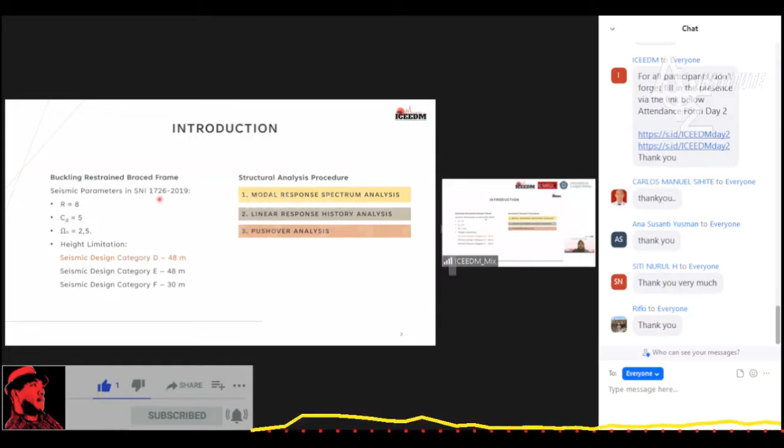In this study, the structural design of BRBF was varied with regard to building height: a 5-story building with a height of 17.5 meters, a 10-story building with a height of 35 meters, and a 20-story building with a height of 70 meters. This variation was chosen to determine whether structures that exceed the height limitation can still meet the code requirements under earthquake load.

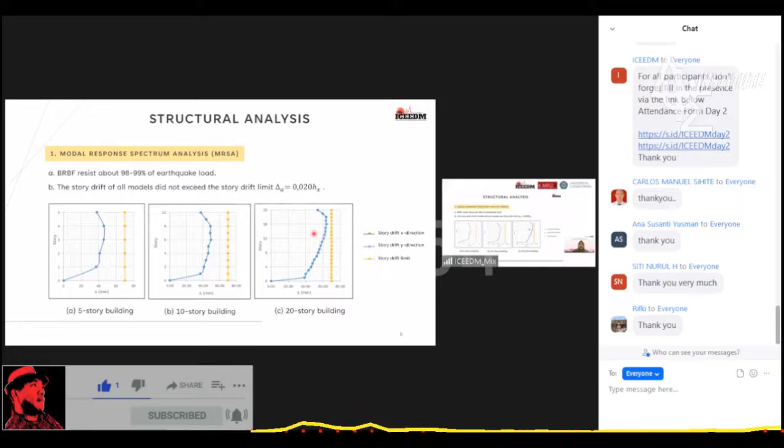And the story drift was evaluated. The green line showed the story drift in the X direction. The blue line showed the story drift in the Y direction, and the orange line showed the story drift limit. The story drift in the X and Y direction has the same value because the floor plan is symmetrical, and the result found that they did not exceed the story drift limit, and the story drift limit is 2% of story height.

The demand capacity ratio for all elements meets the requirements of less than 1. That means all the structural element designs with modal response spectrum analysis are able to resist the load on the structure.

This is the results of structural analysis using linear response history analysis. To verify the design, the structure was analyzed by linear response history after being designed with modal response spectrum analysis. Linear response history analysis requires three pairs of earthquake history data, and the earthquake history data must be spectrally matched to the design's response spectra. The earthquake record data used are El Centro, Chichi, and Northridge.

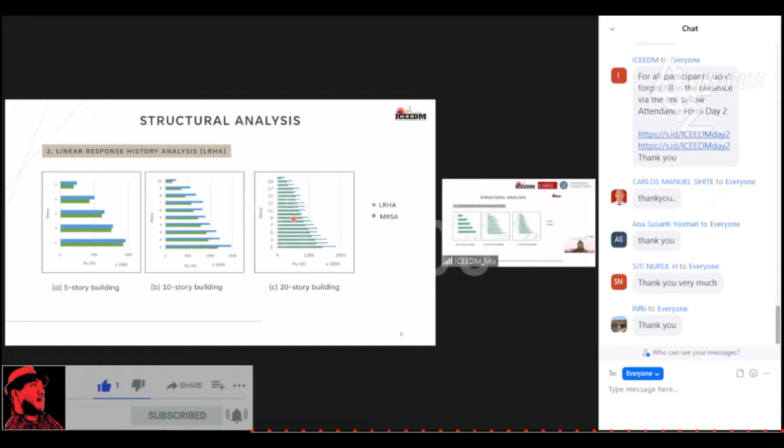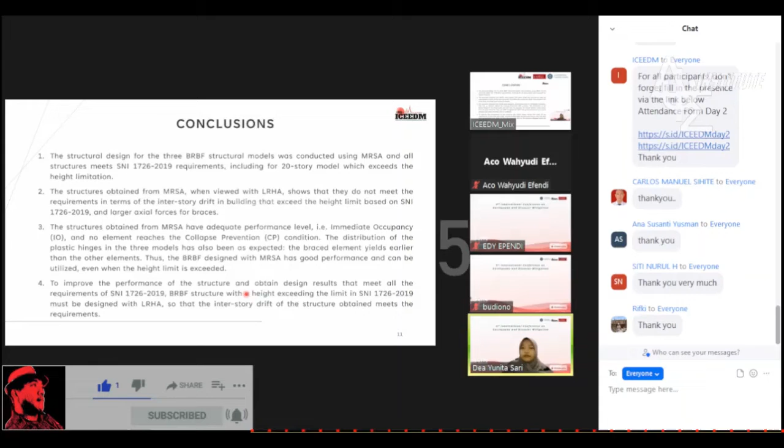And 4, to improve the performance of the structure and obtain design results that meet all the requirements of SNI 1726-2019, BRBF structures with a height exceeding the limit in SNI must be designed with linear response history analysis so that the interstory drift of the structure obtained meets the requirements.

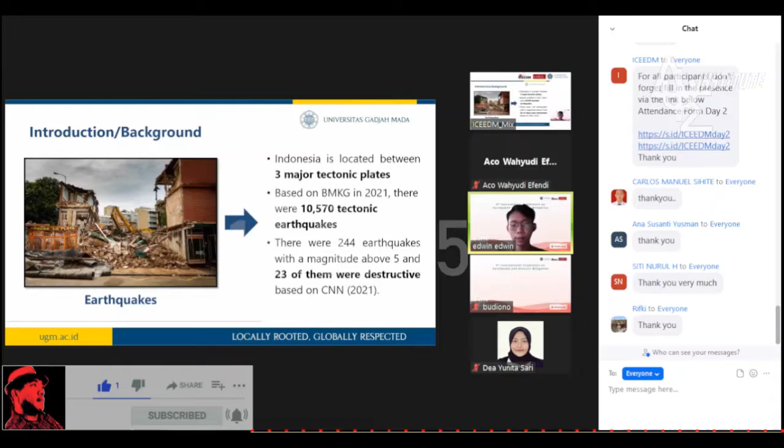First is introduction. As we know, Indonesia is located between three major tectonic plates, namely the Eurasian plate, Indo-Australian plate, and Pacific plate. Based on Badan Meteorologi, Klimatologi, dan Geofisika, in 2021 there were 10,570 tectonic earthquakes. Also, based on CNN in 2021, there were 244 earthquakes with a magnitude above 5, and 23 of them were destructive.

On the other hand, there was also an environmental problem because of waste of used tires. Based on Badan Pusat Statistik in 2021, there was an increase of 1.9% in the number of motorized vehicles. This shows that the waste of used tires will grow over time. One solution is to use waste of used tires to make waste rubber tire crumb, or WRTC, as a mixture for rubber compound.

On the other hand, many types of sand are available in nature, and we often encounter them in life, and they are also easy to obtain. Based on previous research, their surface friction may create a damping effect when encapsulated by flexible material such as rubber.

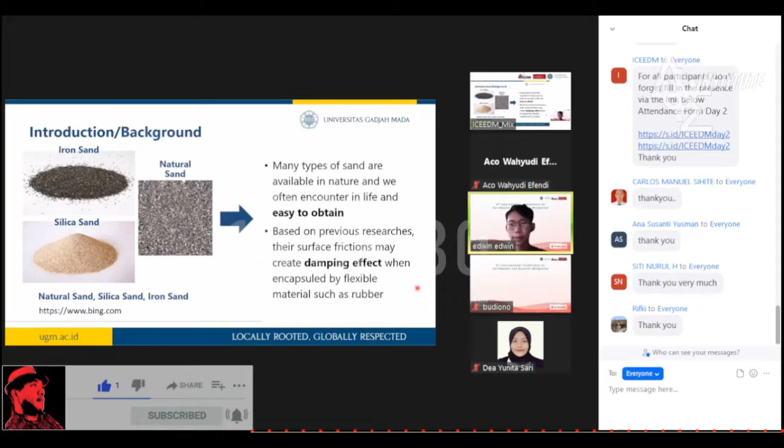Next, I will explain the materials and experimental procedure used in this research. The first material was rubber compound obtained from Polytechnic ATK Yogyakarta. The main component of this compound was natural rubber in the form of ribbed smoked sheets mixed with synthetic rubber, or styrene butadiene rubber.

The second material was WRTC, or waste rubber tire crumb, obtained through an ambient or grinding process. The grain size obtained for this material was mesh 100, or 0.15 millimeters.

Next is natural sand that was obtained from Mount Merapi in Central Java. The fineness modulus of the natural sand is 3.034.

The second sand we used was iron sand, obtained from West Java. The iron sand used had a uniform grain size of 0.15 millimeters, or mesh 100, with a fineness modulus of 0.0028.

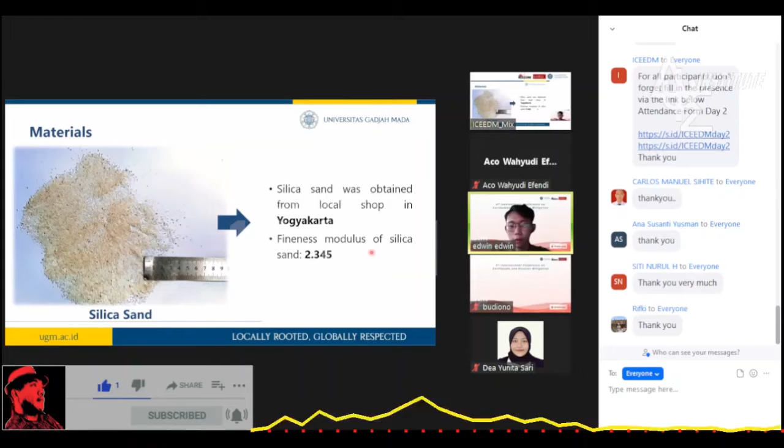Lastly, the material used in this research was silica sand, obtained from a local shop in Yogyakarta. The silica sand had a fineness modulus of 2.345.

Before being used to make specimens, natural sand, iron sand, or silica sand are washed and dried in an oven at 110 centigrade for at least 24 hours.

4 pieces of rubber test specimens were made for every mixture variation. For the tensile test and hardness test, the specimens used were R1 and R2 mixture, but for the damping test, the specimens used were all 5 variations.

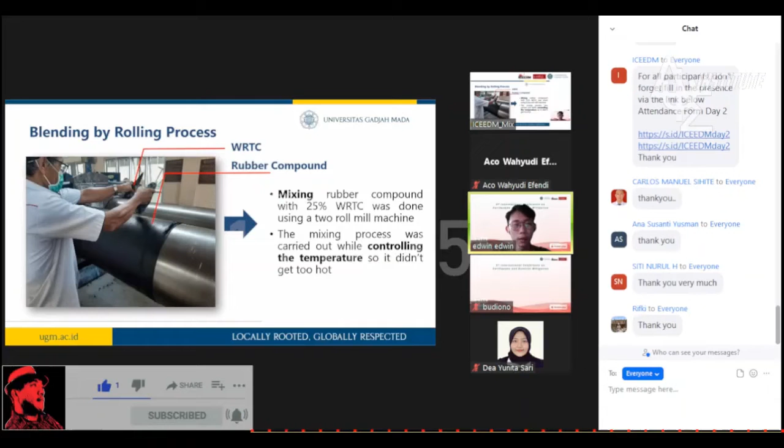After that, rubber mold was made and then filled with natural sand, iron sand, or silica sand, and the top side will be covered with a rubber compound, as we can see in the figure.

The last step was the vulcanization process using a press machine. The time and temperature used in this vulcanization process was the same that we get from the rheology test. The vulcanization process was done with a temperature of 130 centigrade and time for 17 minutes and 30 seconds.

Next is the testing procedure. First is the tensile test, and this is the specimen used for the tensile test. Dumbbell-shaped test specimens were used for the tensile test with dimensions as shown in the figure.

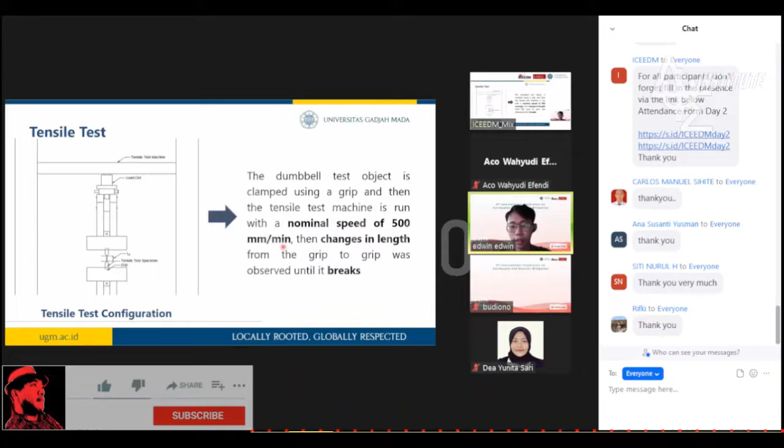And this is the tensile test configuration. The dumbbell test object was clamped using a grip, and the machine will operate with a nominal speed of 500 millimeters per minute, and the changes in length from grip to grip were observed until the test object breaks.

The tensile test was carried out based on SNI ISO 37/2011, and the test was carried out for R1 and R2 specimen.

The equation used to calculate the tensile stress was equation number 1, the equation used to calculate the strain was equation number 2, and the modulus of elasticity of rubber can be calculated using equation number 3.

After the tensile test, there is also the hardness test, and this is the hardness test configuration, and this is the specimen used for the testing.

For this test, compressive load used for this durometer shore A type is 1 ± 0.1 kilogram, which can measure the depth of penetration with a scale of 0 to 100 in 3 until 15 seconds.

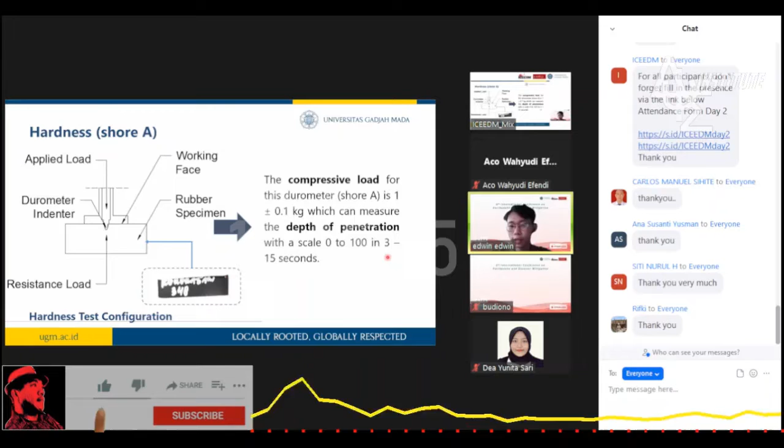There are two types of testing for rubber hardness: durometer test and IRHD test. Durometer test shore A was used in this research to measure the rubber hardness, and the hardness test was carried out based on ISO 7619 2010 standard.

After the tensile test and hardness test, there was also a damping test. This is the specimen used for determination of damping ratio, as we can see in the figure. It was made into a model resembling a viscoelastic damper using two pieces of rubber specimen with dimensions of 100 millimeters times 100 millimeters times 25 millimeters that was glued to the iron plate.

The method used to calculate damping ratio in this research was equivalent viscous damping ratio. The first step was to calculate equivalent stiffness using equation number 4. Then we can calculate the dissipated energy, which is the area inside the hysteresis loop. After that, we can calculate potential energy using equation number 5, and lastly we can calculate the equivalent viscous damping ratio using equation number 6.

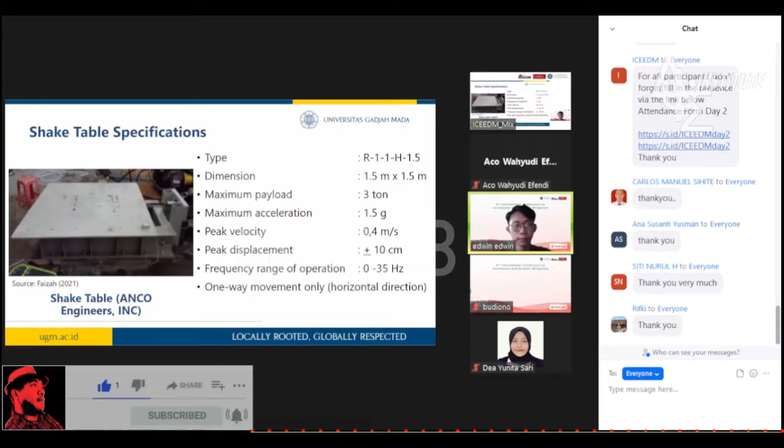Next, we can see the setup used for the damping test. The test was carried out by running a sinusoidal signal on the shake table with a frequency of 0.5 Hertz with various lateral deformations: 4 millimeters, 6 millimeters, 8 millimeters, 10 millimeters, and lastly 15 millimeters.

Next is result and discussion. From the hardness test, the results showed that the addition of 25% WRTC caused an increase in the hardness value of the rubber by 11%.

Different from the hardness test results, the results in the tensile test showed that the addition of 25% WRTC caused a decrease in the tensile strength by 19%. And this is the results for modulus of elasticity of rubber, where it showed that the addition of 25% WRTC also caused a decrease in the modulus of elasticity by 5%.

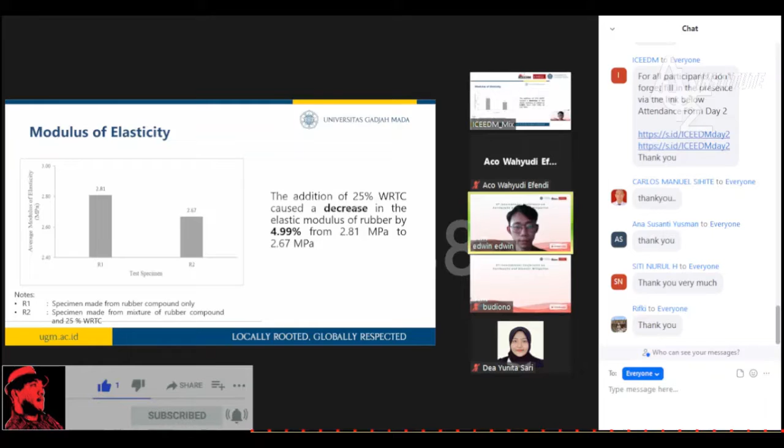Next, we will see the results for the damping test. Here, we can see the hysteresis loop graph for R1 specimen, made from rubber compound only. Next is the graph for R2 specimen, made from mixture of natural rubber compound with 25% WRTC. This is the graph for R3 specimen, or R2 specimen with compacted natural sand. This is the graph for R4 specimen, or R2 specimen with compacted iron sand. And lastly, this is the graph for R5 specimen, or R2 specimen with compacted silica sand.

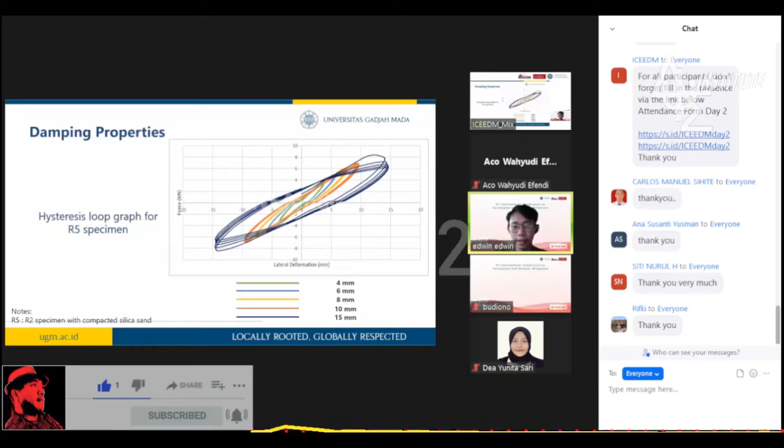Next, we can see the equivalent viscous damping ratio results for R1 and R2 specimens. Both specimens showed results where the ratio results for R2 specimen is slightly better than the R1 specimen.

Next, we can also see the results for R4 specimen and R5 specimen. The results show that the equivalent viscous damping ratio value increases as the deformation increases. This is due to the damping aid through friction between the sand grains. Therefore, it could be seen that the addition of sand has an effect on increasing the damping ratio of rubber.

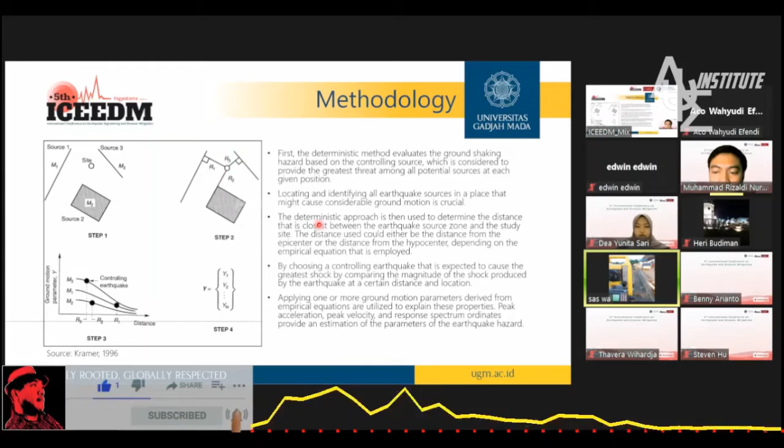Next, the methodology. First, the deterministic method evaluates the ground shaking hazard based on the controlling source, which is considered to provide the greatest threat among all potential sources at each given position. Locating and identifying all earthquake sources in a place that might cause considerable ground motion is crucial. The deterministic approach is used to determine the closest distance between the earthquake source zone and the study site. The distance used could either be from the epicenter or the hypocenter, depending on the empirical equation employed. By choosing a controlling earthquake expected to cause the greatest shock, comparing the magnitude of shock produced at a certain distance and location, one or more ground motion parameters derived from empirical equations are utilized to explain these properties. Peak acceleration, peak velocity, and response spectrum ordinates provide an estimation of the earthquake hazard parameters.

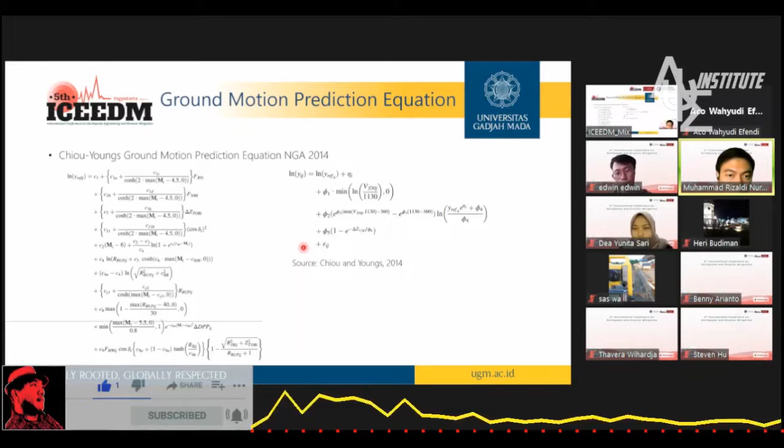Next is the logic tree framework. The weighting of each parameter calculation function is determined before the logic tree function output is assigned a particular weight. The weighted value represents the amount of confidence in the parameter in question. The final result, which is the total different weight value, may be calculated using the weight value. When all parameters are added together, a value of 1 is achieved. The final result is calculated by adding the weight of each parameter.

Rizaldi, are you with us? Rizaldi, are you with us? This connection is lost. Okay. Yes, are you there? Yes, I'm here. Can I continue? Okay.

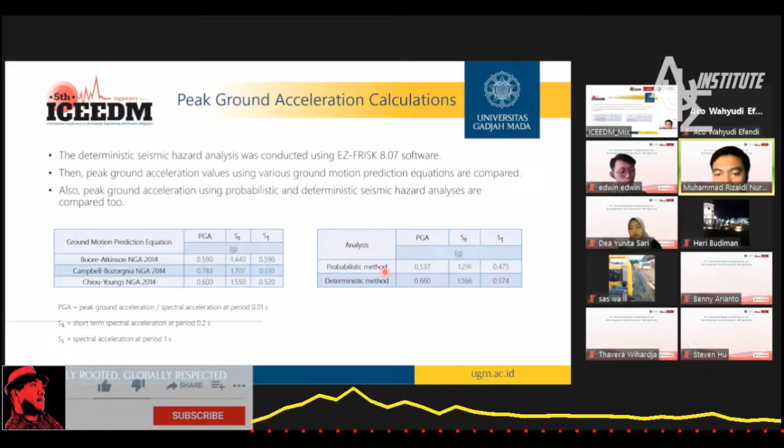The PGA value is 0.66 G according to the deterministic method, compared to the calculation with the probabilistic method of 0.537 G. This is because the deterministic method always considers the worst case scenario of an earthquake event, while the probabilistic method yields a lower value because of the uncertainty surrounding the possibility of an earthquake.

Until now, no one has been able to determine when an earthquake will occur. We can only predict earthquake behavior based on past events, so it's better to prepare for the worst than to cause a lot of loss of life.

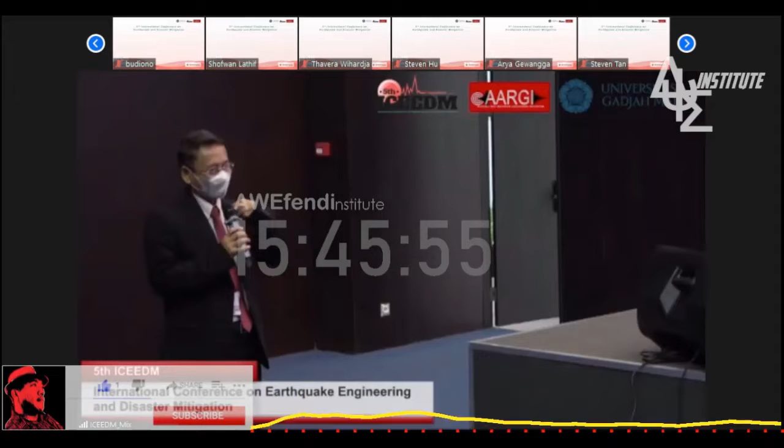The first one is related to the beam-column joint model. The first model was made from ECC. You showed us a comparison of the cyclic loading results in that figure. My question is: were there any cracks developed on the ECC model beam-column joint? At the end of the test, the slide you showed us did not let us see the final result of the test in terms of the cracks.

If it did crack, what is the comparison between the crack width, maybe the number, and also the pattern of the crack, comparing the normal concrete and the ECC concrete? Also, whether you included the reinforcement or not in the finite element model.

Thank you, Prof. Ria. Please, Mas Asdam. Thank you, Sandro, for the excellent questions. I'm going to answer the first one.

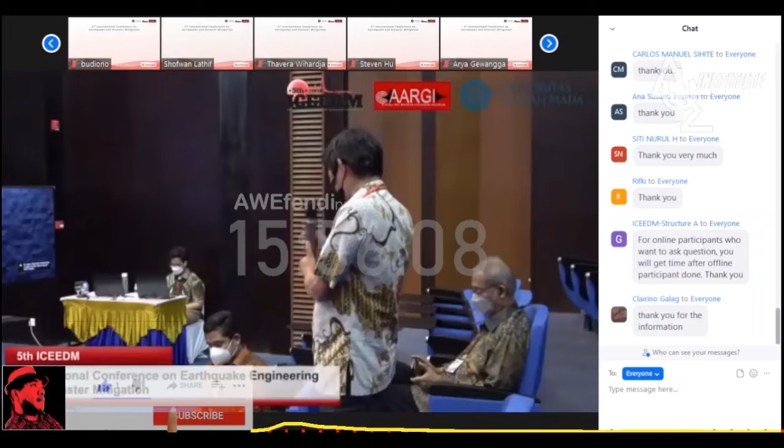Well, thank you, very interesting question. I can confirm that we have done some measurement outside the laboratory. So when I was there, we did some testing and implemented the DIC outside. Regarding the focal length of the camera and the surface of the region of interest that we capture for the phenomenon of cracks, it depends on how large your region of interest is. If it's large enough, you have to move your camera away. But the concern is the pattern applied on the surface - it depends on the size of the region of interest. If you use very small dots, your camera cannot capture the movement of the dots or pattern. So basically you have to try first and compare with the actual cracks when they occur. But the possibility is there, so don't worry.

For this specific experiment, we did get results from the DIC and then the assessment, but we did not present that here at the moment - it's in another publication we plan to publish. But if you want to see the verification we have done, there is one paper we published, though it's not on the beam column joint, rather on the 4-point bending test of the beam. So you can see what we did there. Thank you.

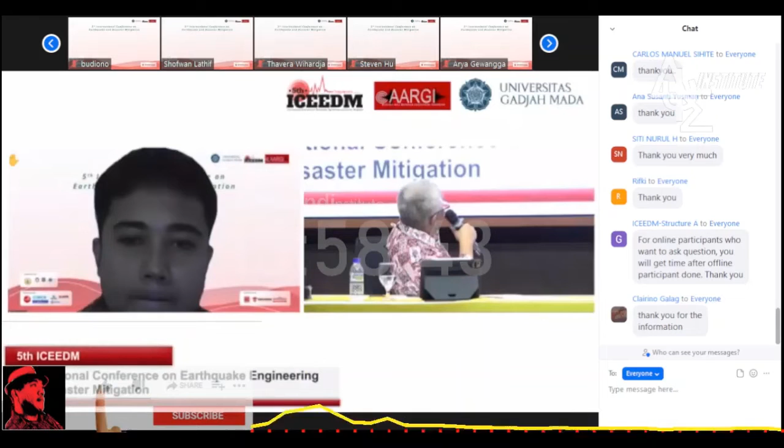Okay, thank you, Professor. My name is Benny, I'm from Universitas Gadjah Mada. I would like to ask a question for the last presenter, Mr. Muhammad - Rizaldi, okay. Yes, Professor.

So my question is, well, first of all, it was a nice presentation and an interesting topic. I would like to ask about the methodology you use. Why did you use the ground motion prediction equation? You did 3 equations - if I'm not mistaken, it was Boore-Atkinson, Campbell-Bozorgnia, and Chiou-Youngs. Why did you choose these 3? Thank you.

Rizaldi, are you with us? Yes, yes. Thank you, Mr. Benny, for the question.

The first reason why I'm using these 3 equations is because these 3 equations specifically use data from shallow crustal earthquakes, which is very suitable for my research location, because my research location only has 6.03 kilometers surface projection from the Seulimeum South segment of the Sumatran fault zone. That fault is also identified as a shallow crustal earthquake source by previous researchers. Second, this equation was also used in making the seismic source and hazard map 2017 by Pusat Studi Gempa Nasional for probabilistic seismic hazard analysis. So it's fair enough to compare the deterministic seismic hazard analysis and the probabilistic seismic hazard analysis using the same equation. That's all from me, Mr. Benny.

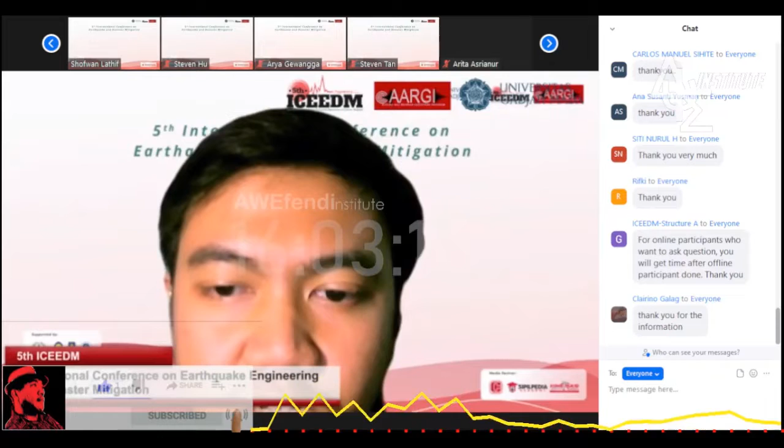First of all, the objective of this study was to design the seismic load due to the excavation and construction of the Dam Suppletion Tunnel. Because, as I said before to Mr. Benny also, the site location has a 6.03 kilometer surface projection from the Seulimeum South segment of the Sumatran fault zone. So that's why I need to design the seismic load in case there's a big earthquake source from the Seulimeum South segment Sumatran fault zone.

And last, for the research, I also want to compare the DSHA and PSHA on the stability of the support system for the Dam Suppletion Tunnel. It is still ongoing, but it is crucial to do the seismic load design first. So that's all for Mr. Clairino. Thank you.

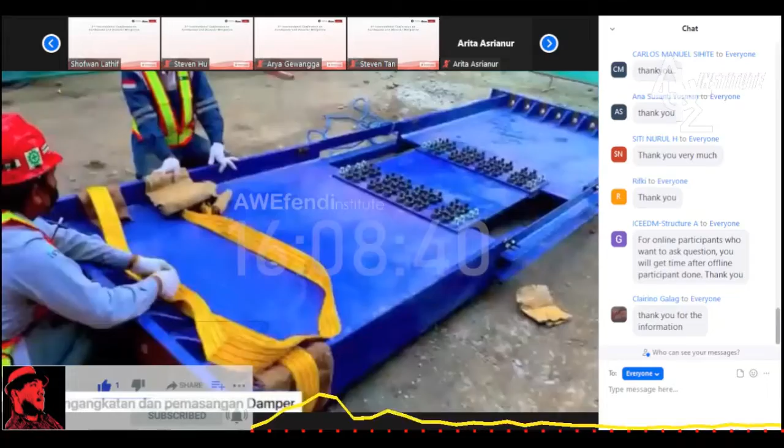This damper is designed to reduce lateral displacement, so that the interstory drift should be less than 1%. If we don't use this damper, the lateral interstory drift will be up to 2%.

When the earthquake enters our structure, the energy has been reduced, maybe up to 60 or 70%. That's why the effect of the earthquake on our building will be much better. We hope that using these dampers will make the building more comfortable. Without them, the earthquake energy would enter our building at full capacity; however, at every floor that we have, it will be reduced by the damper.

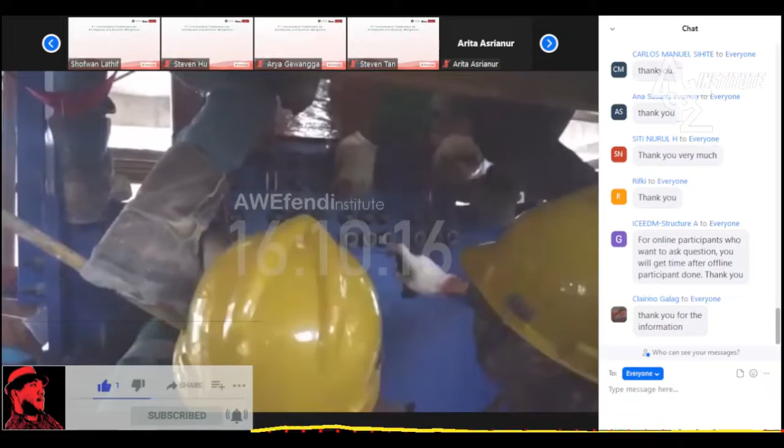This building is also equipped with 13 accelerometers. There are 3-axis accelerometers on the ground floor, and there are 2-axis accelerometers on certain floors, so that we can monitor the lateral displacement at any time. At certain displacement levels, these accelerometers can alarm, and hopefully everybody using this building will be safer.

We are going to use this seismic device, so of course we should make sure that all the parameters used in the model comply with the real behavior of the device. Therefore, it is important that the device be tested before we use it in the model and before we use it in the real building.

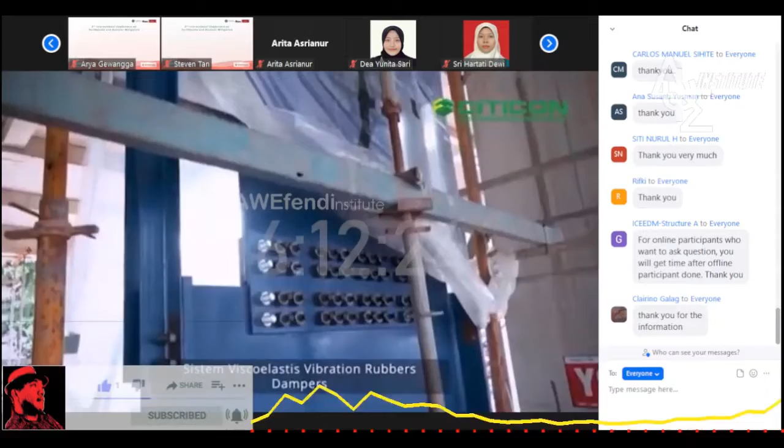So we have to consider the situation. Related to preciseness, we have only a 2 millimeter tolerance in order to make the damper work properly. The second issue relates to construction schedule matching: we have to start construction, then pack and ship to Indonesia. So in terms of scheduling, the method we use is steel plates in the position of the dampers, and once the damper comes to the site, we release the dummy damper and replace it with the original one.

There are 2 objectives of testing this device in the laboratory. The first is to find out the proper parameters to be used in the modeling, and the second is to make sure that the behavior of this device satisfies the code.

This kind of method is actually really interesting, because we have to check the preciseness of production in Indonesia to match the standard production from the damper production in Japan. The second thing we have to match is the scheduling, how to maintain the progress and sequence to the arrival of the damper from Japan.

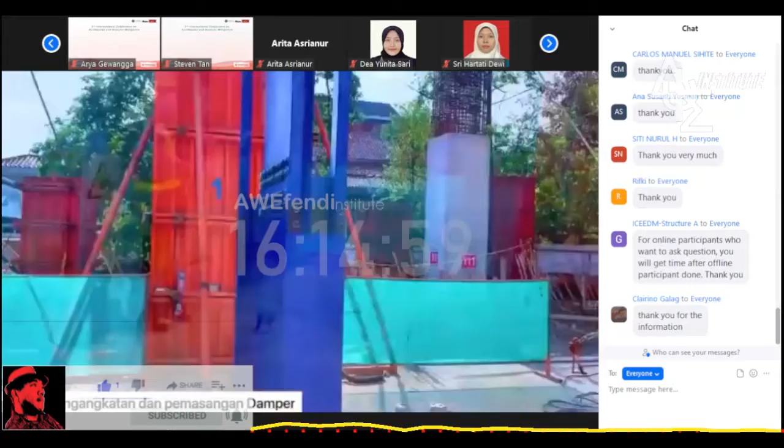In SNI 2019, this device is categorized in chapter 13 about dampers. It is said in the code that before we use this device, we should carry out laboratory tests to check the behavior of this device, whether it is satisfactory or not. So in terms of the use of the damper, these are the two aspects we really have to be concerned about: number one is related to construction method preciseness, and the second one is how to match the schedule.

Construction becomes more challenging, and we are very thankful to all parties, from the consultant, the producer, and the contractor, for making the construction possible. We would like to promote the use of this kind of application in Indonesia, and this kind of damper is not only for new buildings, but also a very good opportunity to implement in existing buildings.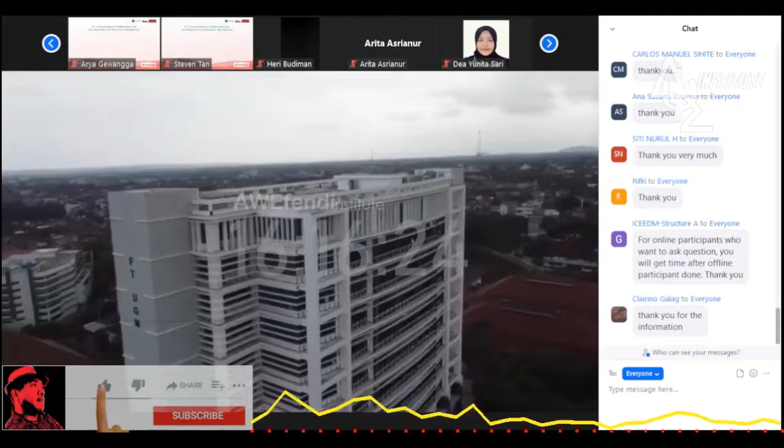When an earthquake comes and strikes, our structure will behave better and better, not only at one earthquake, but at every earthquake we have in the future, in order to retrofit and seismically improve the performance of existing buildings.

So we do hope that the use of this kind of damper system, made of viscoelastic high damping rubber damper, becomes more known in engineering communities, and that in time we can use it in more kinds of construction, both for new buildings or for existing buildings for seismic improvement. Thank you.

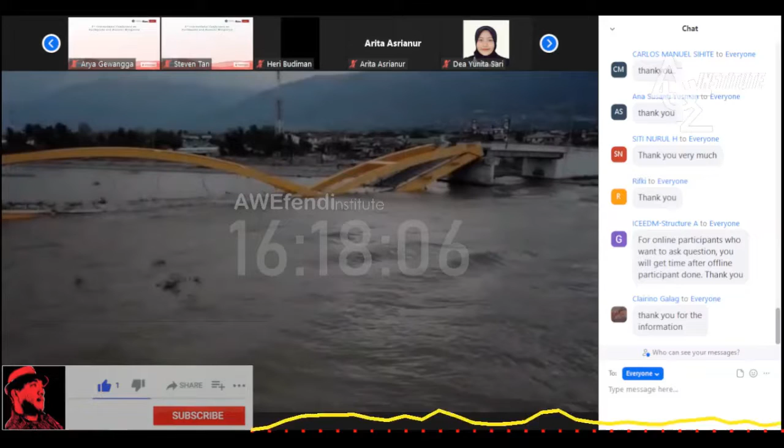Indonesia experiences frequent earthquakes due to its position on the Pacific Ring of Fire, an arc of intense seismic activity where tectonic plates collide. It stretches from Japan through Southeast Asia and across the Pacific Basin. Earthquakes are one of the biggest threats to Indonesia in terms of natural disaster, as they often strike in populous areas such as the bigger cities, making many people lose their life, homes, and property.

According to the USGS, earthquakes with a magnitude of around 5 on the Richter scale occur almost daily in Indonesia, but often with little to no damage. More devastating earthquakes are the ones with a magnitude above 6 on the Richter scale. The great degree of material damage is exacerbated by the poor state of the country's infrastructure, which only increases the devastating consequences of earthquakes.

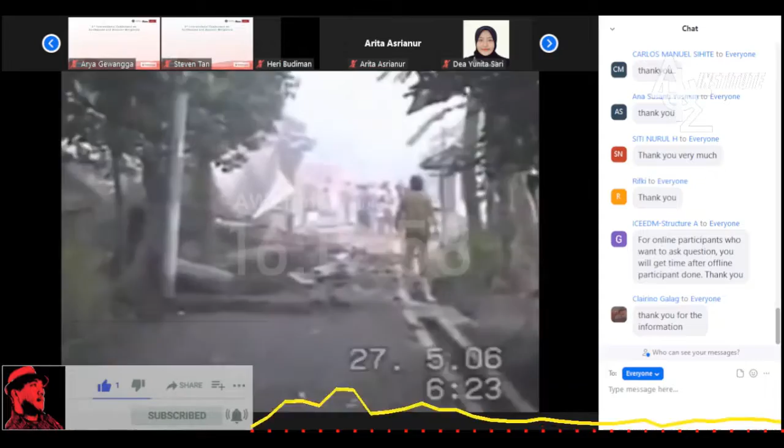On 27 May 2006, an earthquake occurred in Yogyakarta and its surrounding area, such as the districts of Bantul, Klaten, Gunung Kidul, and Kulon Progo. The 2006 Yogyakarta earthquake, also known as the Bantul earthquake, occurred at 5 a.m. with an epicenter position of 7.97 degrees south latitude and 110.44 degrees east longitude, a depth of 10 km, and a moment magnitude of 6.3.

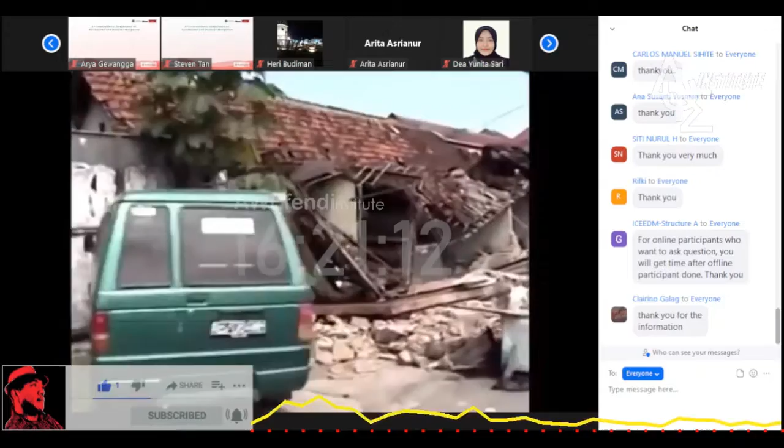The epicenter of the earthquake was located about 6 km from the coast at a depth of 35 km in the South Sea, and the maximum MSK intensity was 8. This earthquake shocked the coastal areas of Parangtritis, Baron, Samas, Blagah, Wonosari, and Gunung Kidul, located in Ring 1, followed by Bantul, Kulon Progo, and Klaten district in Ring 2. Other DIY areas were also shaken, from Keraton and Sapen to Kaliurang. The earthquake was even felt as far as Purwokerto, Magelang, and Purbalingga in Central Java.

The earthquake caused damage to people's homes and public facilities. The area that was most severely affected after the earthquake was not Ring 1, but Bantul Regency, located in Ring 2, with the largest concentration of losses in Bambanglipuro sub-district, followed by Imogiri, Pleret, Piyungan, and Sewon. The Bantul area has an alluvial soil structure, which caused severe devastation after the earthquake.

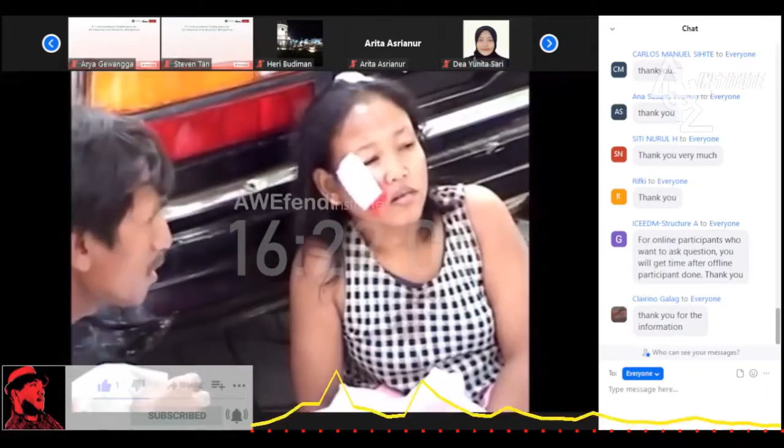Overall, the earthquake resulted in more than 5,800 people being killed, 120,000 buildings destroyed, and financial losses of 29.1 trillion rupiah, or 3.1 billion US dollars. The government immediately responded to this condition with more speed than in responding to the post-tsunami disaster in Aceh at the end of 2004.

Construction company? Infrastructure?

Well, you're not wrong. But it goes beyond your imagination. Here's a story you have never heard before.

The world's business has changed since the pandemic, but our company experienced a tremendous change to keep growing. We are more than just a construction company.

See this beautiful property? Fascinating, isn't it? For each of our customers, we work passionately to improve connectivity, efficiency, and ease of access for citizens' lives. And that's not all, we do much more.

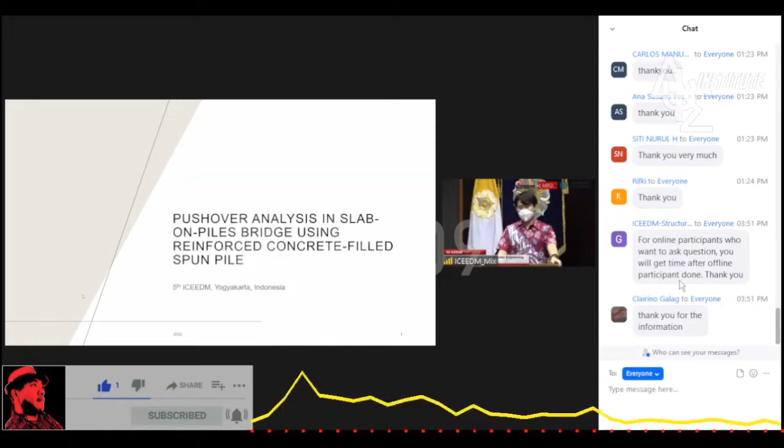I will divide my presentation into 5 sections. I will start with an introduction, and then I will talk about the theoretical background. Then I will talk about the research methodology used in this study. Next, I will talk about the result, and the last one is the conclusion.

The slab-on-piles bridge is one of the railway bridge structure types currently being developed in Indonesia. There are several railway bridge structures that use this structure type, such as Soekarno-Hatta International Airport Railway Bridge, Adi Sumarmo International Airport Railway Bridge, and also Yogyakarta International Airport Railway Bridge.

The structure type consists of 3 main components: the slab, the pile head, and the spun pile.

The structure type also has some advantages. First, it is more stable for roads built above water-saturated soil, because it uses spun pile that penetrates into a certain depth of soil to hard soil. Second, the quality is more guaranteed because it is produced at the factory. Third, the construction time is faster. And fourth, cost for maintenance and also for construction is more efficient.

The problem is that the construction of slab-on-piles bridge structure is a concern, because the structure is prone to earthquake loads. And as we know, Indonesia is very prone to earthquakes.

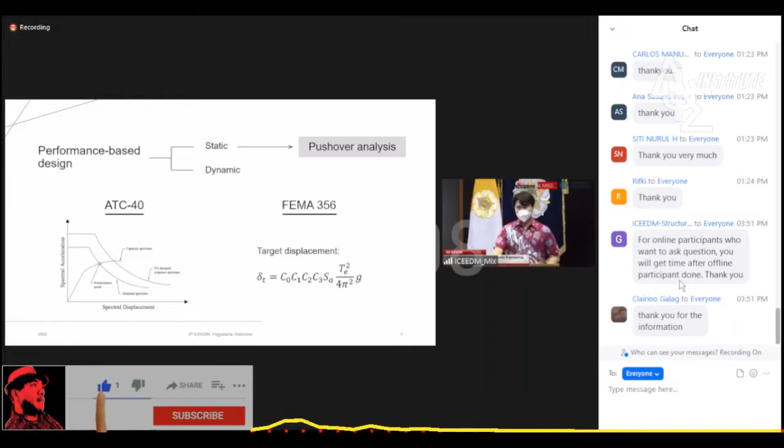Capacity is the structural ability to resist the demand of earthquake load, and this depends on the strength and the deformation ability of its component of the structure.

The demand spectrum is the earthquake load applied in this graph in the form of an elastic response spectrum at 5% damping.

The two spectrums, the capacity and the demand spectrum, are depicted in a single graph, as we can see in the figure on the left side, to find the performance point. The performance point is the intersection of the capacity spectrum and the appropriate demand spectrum.

Meanwhile, in FEMA 356, the pushover analysis, especially the nonlinear static pushover analysis, can be done by calculating the target displacement. The target displacement shall be calculated by following this equation after the force displacement curve is obtained.

The performance determination of the slab-on-pile bridge structures in this study is based on ASCE 61-14, because the structure is similar to a wharf structure.

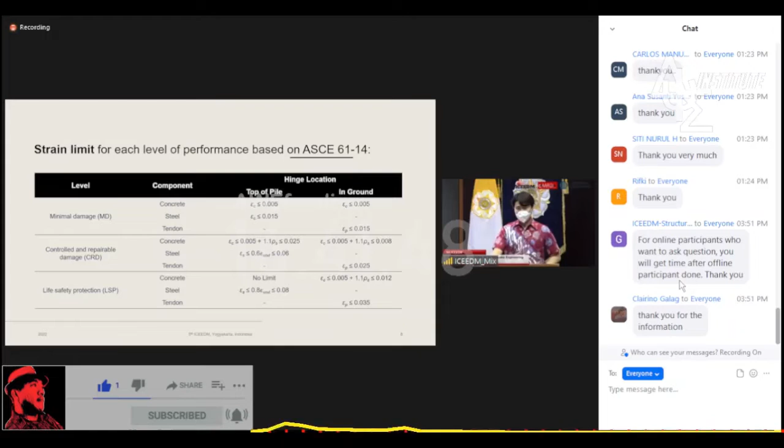The slab dimensions are 20 by 10.3 meters, and the free height of RCF-SP we use is 6 meters.

Standard penetration test to 30-meter depth of soil, and based on the calculation, the soil type is classified as soft soil. The fixity depth of the 6-meter RCFSP is obtained at 3 meters from the ground level, so the effective length of RCFSP is 9 meters.

The earthquake analysis we use in the study is the response spectrum analysis. The response spectrum design is constructed based on Indonesia National Standard, or SNI 2833-2016, where the location of the bridge is in Aceh, Indonesia. Linear elastic bridge design is carried out with a response modification factor, or R, of 3.5.

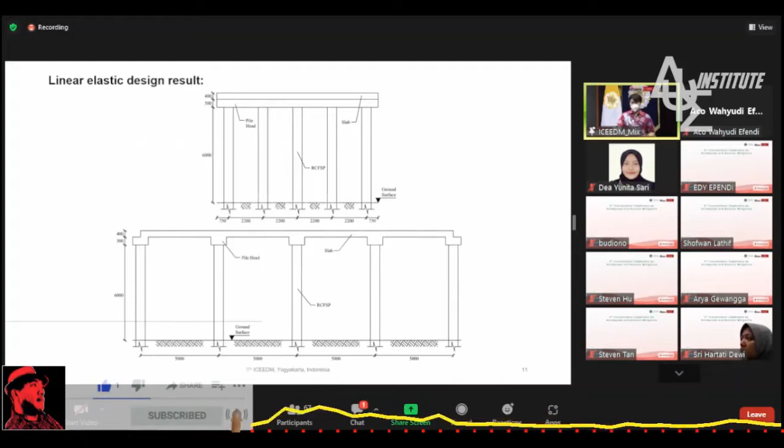After that, we can jump to the next part of this analysis, and the next is nonlinear static pushover analysis. The first step we use in this analysis is the determination of plastic hinge properties. The plastic hinge properties in the study are assumed to be located only at the points where the maximum moment occurs, so the plastic hinges are located at the top and the fixity point of each RCFSP.

The plastic hinge properties are defined in the form of moment curvature diagram. Moment curvature diagram calculations are carried out under considerations of axial load that consist of structural dead load, additional dead load, and half of live load. And then after the moment curvature diagram is obtained, we can run the nonlinear pushover analysis.

In this nonlinear pushover analysis, unit lateral loads are assigned at all top nodes of the RCFSP to perform the pushover analysis in the longitudinal and transversal directions. The nonlinear geometric parameter, or P-delta, is applied, and the pushover analysis is performed until the monitored displacement is reached the displacement control, where the displacement control is a 5% drift ratio of the effective length of RCFSP. In this analysis, ATC 40 and FEMA 356 are used as a reference for the nonlinear static pushover method.

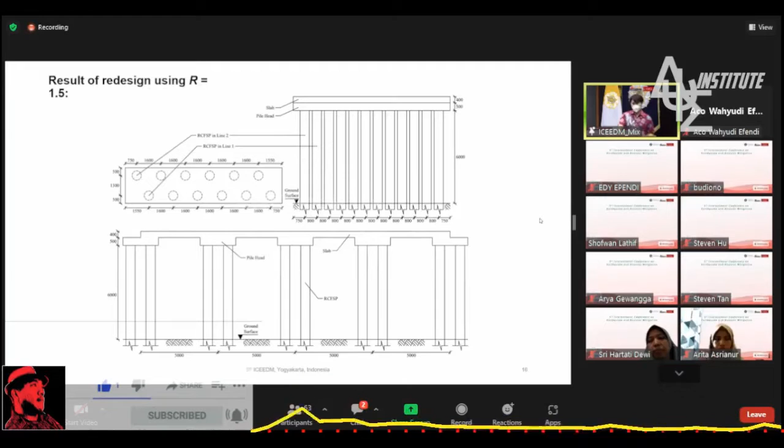This is the result after we redesign the structure using R value of 1.5. Because the R value is different, of course the design results is also different. Based on this result, the number of RCFSP needed in one segment of slab-on-pile bridge is 60 pieces of RCFSP that are divided into 5 groups, and each group consists of 12 RCFSP that are arranged into 2 rows, as we can see in the figure on the left above side.

And we also do the pushover analysis again for the redesigned structure. Now we can see based on ATC 40 method, the performance point could be determined.

3 more minutes. Okay, thank you.

In the longitudinal direction, we get the displacement at 0.066 meters, and in the transversal direction is 0.062 meters. Based on FEMA 356 method calculation, we can also reach the target displacement by the structural capacity. In the longitudinal direction, we get the target displacement at 0.065 meters, and in the transversal direction, we get target displacement at 0.06 meters.

All of these results indicate that now the redesigned structure could resist the design earthquake load.

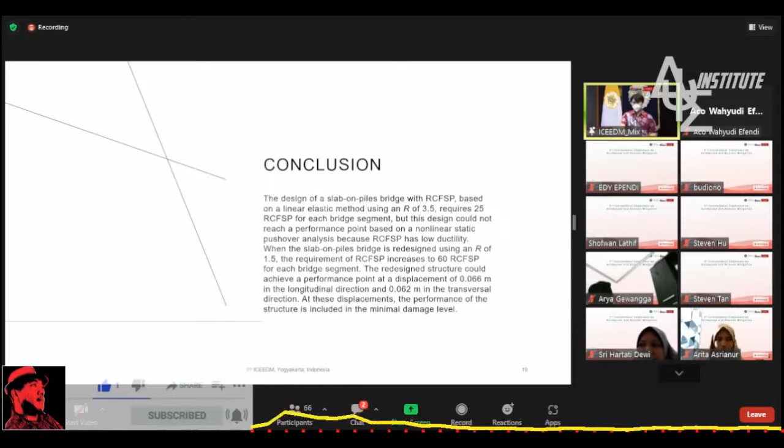I think that's all of my presentation. Thank you so much for your attention.

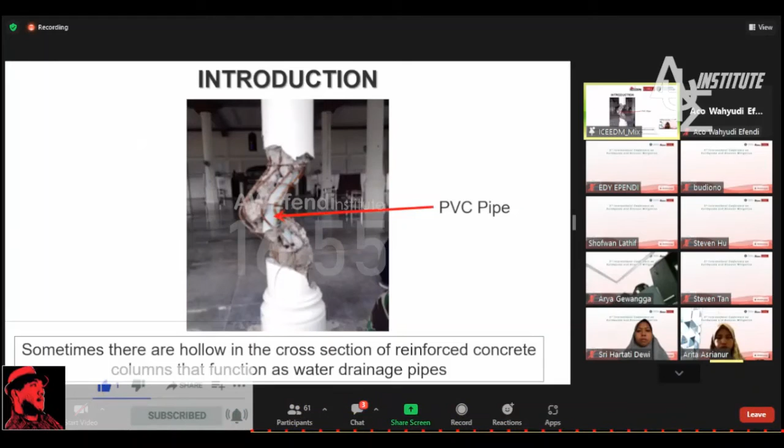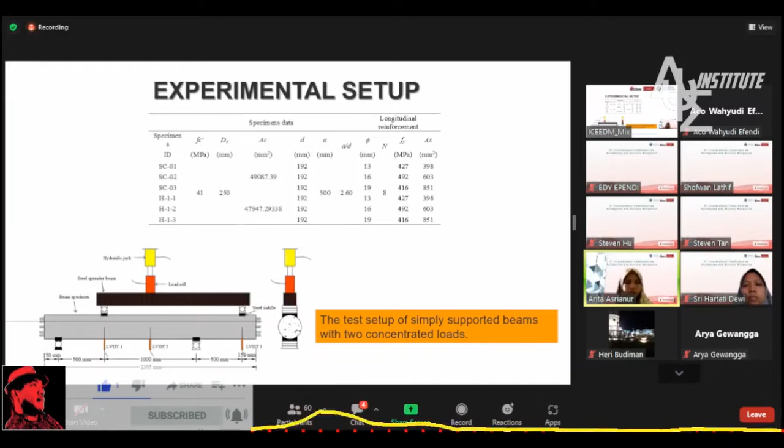This table contains the material data for each specimen. The test setup is simply supported beams with 2 concentrated loads, so the internal forces that occur due to loading like this represent the actual internal forces in the building structure.

What I mean is the internal force that occurs in the experimental setup is set the same as the internal force that occurs in the actual conditions of the reinforced concrete column, as shown in the figure. Next, for the analytical study, the flexural capacity of circular cross-section was calculated based on the fiber element method, which is done by dividing the cross-section and reinforcement into elements, and it was implemented into a computer program.

From the test result, it can be reported that the first crack appears in the maximum bending moment zone with an average value of 23 kilonewton.

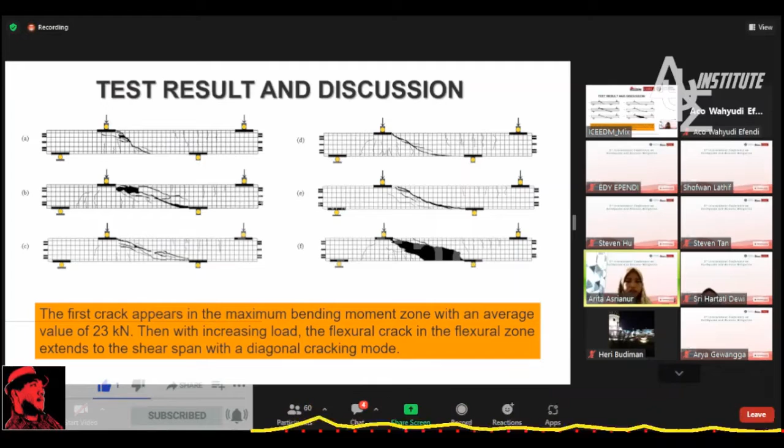Then, with increasing load, the flexural crack in the flexural zone extends to the shear span with a diagonal cracking mode. These figures show the crack pattern of the specimens, and it's shown that all specimens failed in sudden shear with wide diagonal cracks as predicted in this study.

For the last, it can be concluded that all specimens in this study failed in shear mode, indicated by the occurrence of a sudden wide diagonal crack, and the maximum hollow area stated in the code, 4%, provides conservative results for the shear strength of hollow reinforced concrete structural elements.

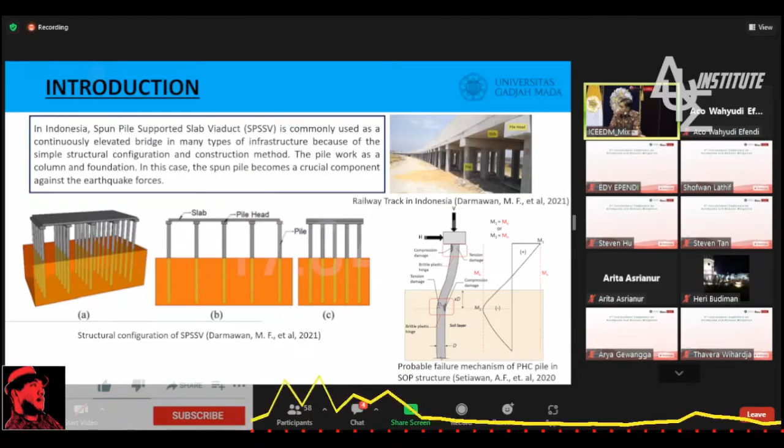So in a high seismic region, maybe when an earthquake occurs, the column that also works as foundation will resist the lateral force due to the earthquake. So it will have plastic deformation at the top near the pile head, also in the soil, making a double curvature bending moment.

Then based on the previous study about the spun pile, it behaves with brittle failure, also low energy dissipation, because it achieves a pinching hysteresis loop, so not much energy dissipation can be achieved.

In practice, also in some academic studies, they propose to give concrete infill, RC concrete infill, in the top area, maybe with a length of about 2 meters or 3 meters, to increase the bending moment strength, also the shear strength.

Also, according to some previous researchers, they make a numerical model considering soil structure interaction to accommodate the near-real behavior of the slab-on-pile structure, and also some researchers do pushover analysis to achieve the performance points of the slab-on-pile.

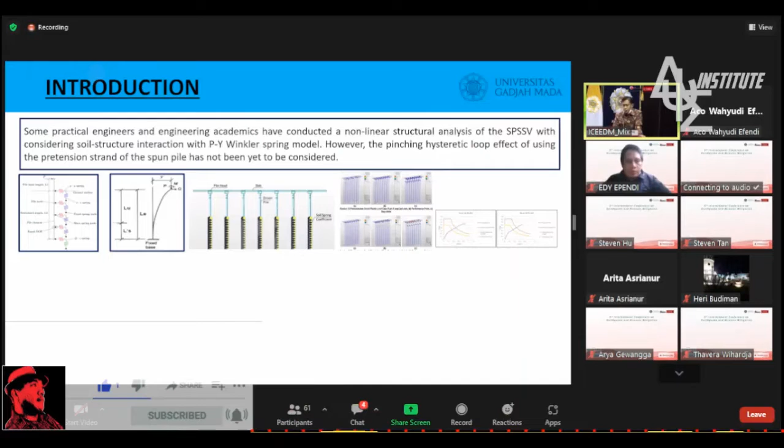Then in a previous study, the numerical study of the spun pile model has been conducted by considering the pre-stress effect, so it can achieve good agreement with the experimental result with the pinching hysteresis loop.

Also, in some previous studies, there is a comparison between the slab-on-pile with the spun pile and RC structure, reinforced concrete pile or bored pile. According to the result, we can see at the left the hysteresis loop of the slab-on-pile with spun pile, and at the right, B, the slab-on-pile with RC bored pile.

We can also see, based on the pushover analysis and comparing the maximum response under nonlinear time history analysis, that the RC bored pile has less response, meaning it has better performance compared to the RC spun pile.

Therefore, nonlinear analysis of the spun pile supported slab viaduct should consider soil structure interaction and the pre-stress effect. So this study discusses the inelastic behavior of an extended spun pile supporting bridge structure considering soil-pile interaction. In the study, nonlinear analysis including static pushover and cyclic loading is conducted to investigate the moment and curvature, also hysteresis energy dissipation.

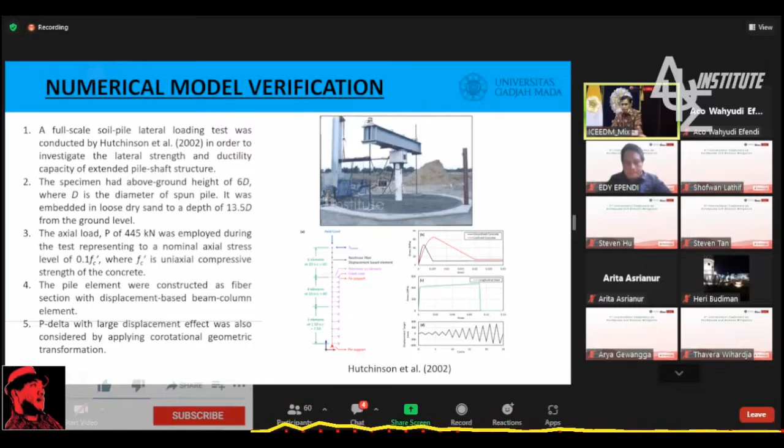And then here the results. So in graph A, the experimental result with the black line, and then the numerical result with the red line. They have good agreement.

Here the numerical model is the freestanding pile without restrained moment, because freestanding. And then if we implement it in the slab-on pile, the top of the pile will have restrained moment. So we try to give the restraint moment at the top of the pile. The result is there is a slope in the green color, so it has larger lateral strength, of course.

And then in this study, we generate one pile from the slab-on pile. So just one pile. It has a head, one meter, and then embedded in the soil until 30 meters.

We use a nonlinear beam element, displacement-based element with fiber section, also considering the initial stress of the PC bar to account for the pinching effect due to the pre-stress. For the soil model, we use the soil spring with Winkler model, using the P-Y material model.

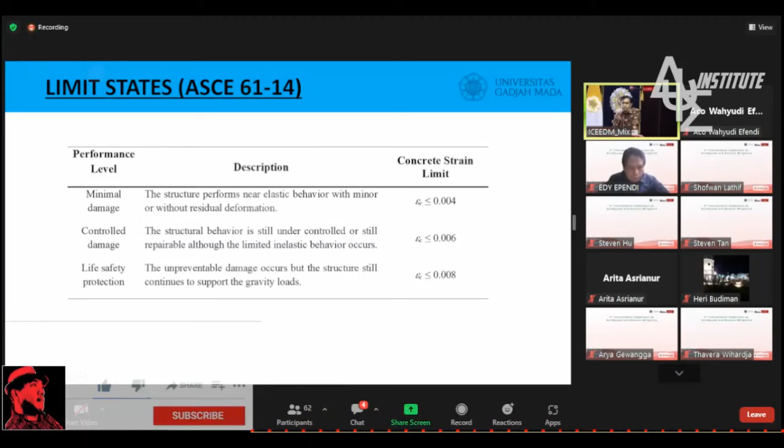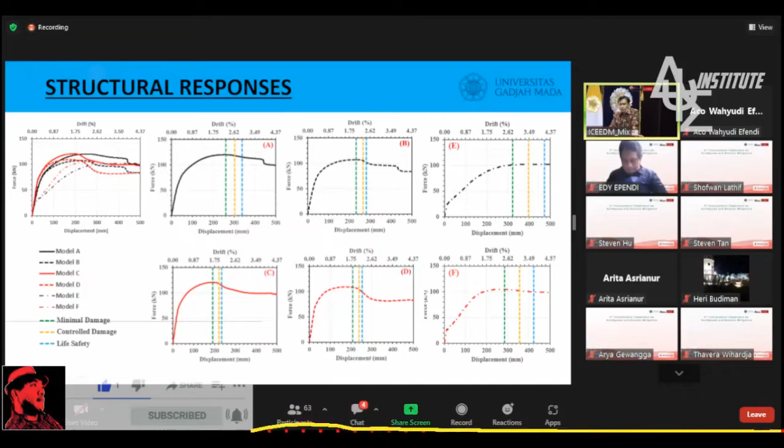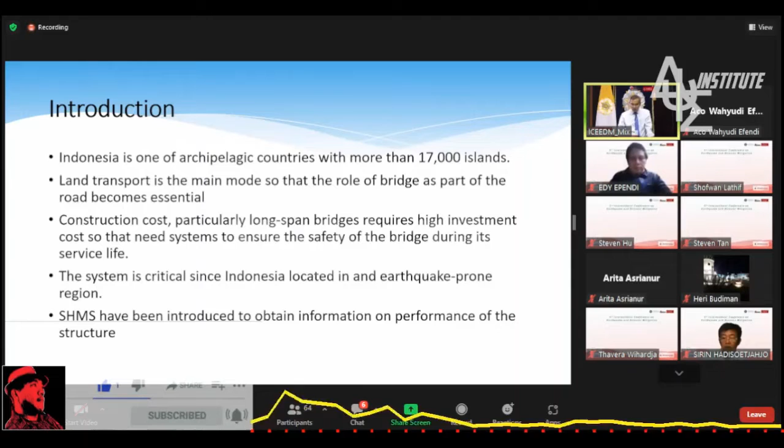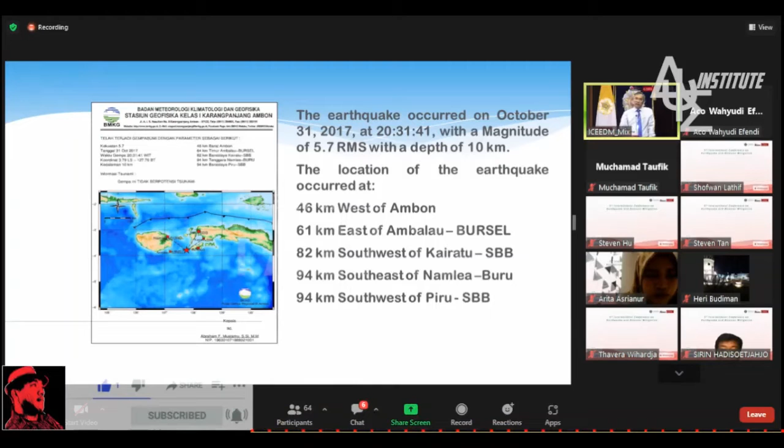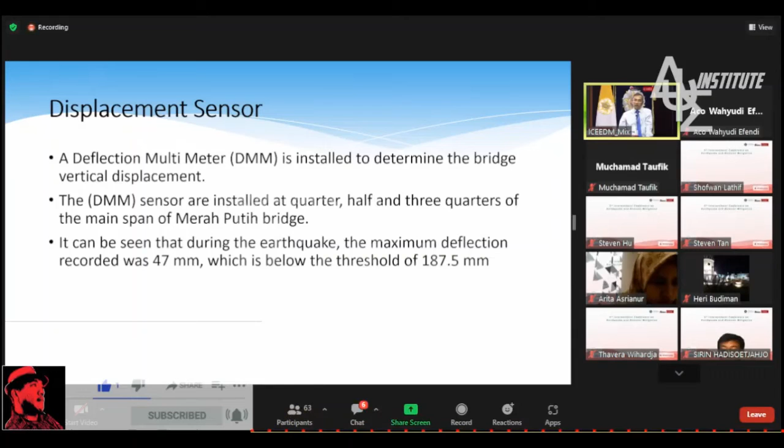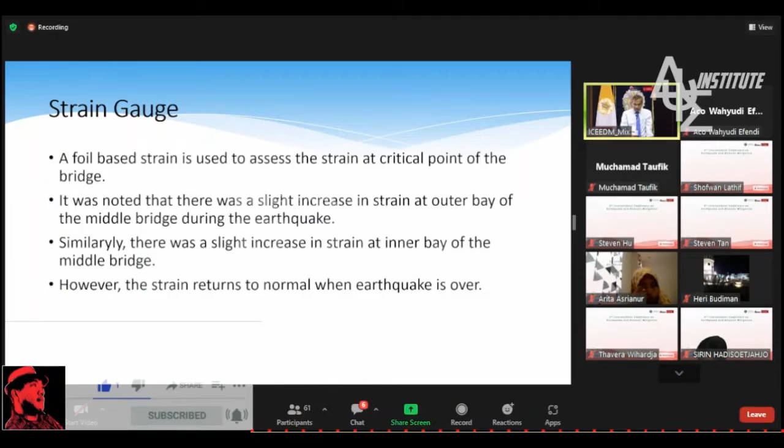From this explanation, we can see how the structure responds in real-time based on SHMS, so that we can understand the structural behavior of the bridge before and after the earthquake. The collected data from sensors have been verified with design assumptions and specifications to determine the safety level of the bridge.

From this presentation, we can conclude that the seismic sensor installed on the bridge can provide the earthquake force that impacts the bridge. Second, the pylon of the bridge experienced the most significant effect due to the earthquake, but the rotation recorded by the tilt meter disappeared after the earthquake.

Third, due to the earthquake, the vertical deformation of the bridge increased, but the magnitude was not significant. Fourth, the cable force also increased during the earthquake, but remained at an acceptable level. Fifth, the response recorded on the bridge before, during, and after the earthquake showed that the bridge response returned to its pre-earthquake condition. This indicates that the bridge still behaves elastically.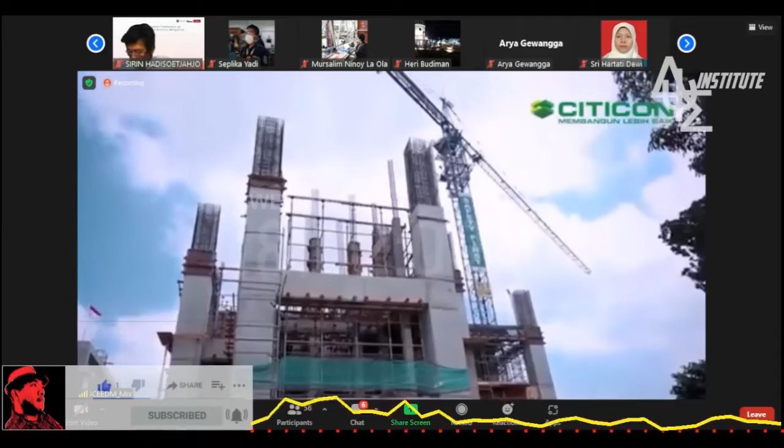The challenge regarding the construction of STLC is related to the preciseness, and the second one is related to schedule matching, because the damper holder is prepared in Indonesia, while the damper itself is produced in Japan.

This damper is designed to reduce lateral displacement, so that the interstory drift should be less than 1%. If we don't use this damper, the lateral interstory drift will be up to 2%.

When the earthquake enters our structure, the energy has been reduced, maybe up to 60 or 70%. And that's why the effect of the earthquake on our building will be much better.

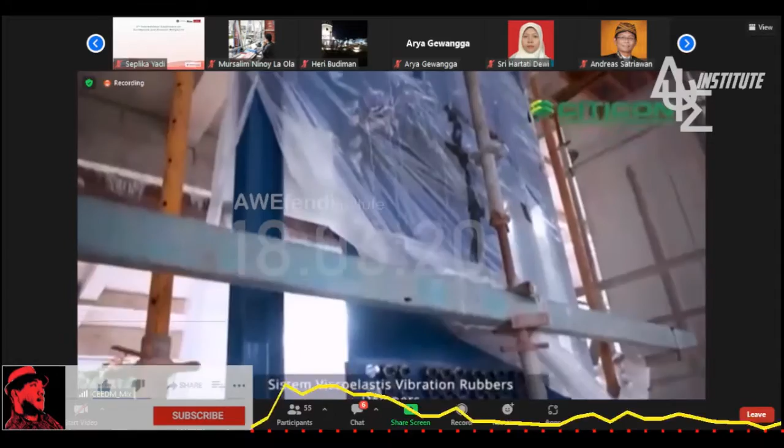So we have to consider the situation. Related to preciseness, we have only 2 millimeter tolerance in order to make the damper work properly. And the second one, related to construction schedule matching, we have to start construction while the damper is under production, then pack and ship it to Indonesia.

So in terms of schedule matching, I had to modify the method, which is to use a dummy damper. I used steel plugs in the position of the dampers, and then once the damper comes to the site, we release the dummy damper and replace it with the original one.

There are two objectives of testing this device in the laboratory. The first one is to find out the proper parameters to be used in the modeling. And the second one, we need to make sure that the behavior of this device satisfies the code.

This method is actually really interesting because we have to check the preciseness of production in Indonesia to match the standard production of the damper production in Japan. The second thing is we have to match the scheduling, how to maintain the progress and sequence to the arrival of the damper from Japan.

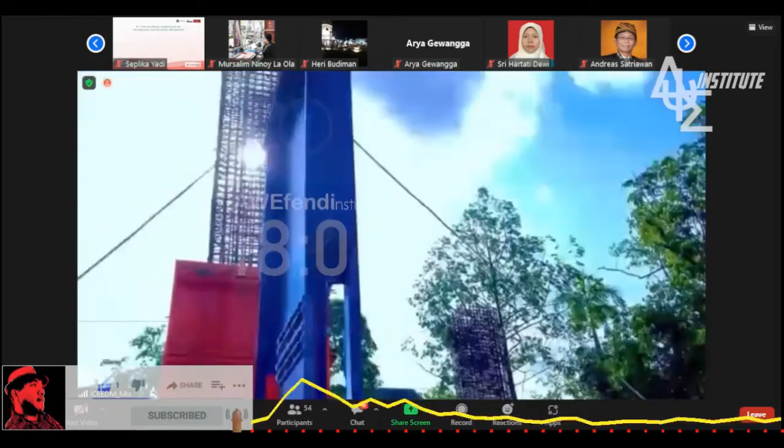So I think in terms of the use of the damper, these are the two aspects we really have to concern about. Number one is related to the construction method and preciseness, and the second one is how to match with the schedule for the construction.

This is the situation where the construction becomes more challenging, and we are very thankful to all parties, from the consultant, the producer, and the contractor, for making the construction of damper structures become a reality. I would like to promote the use of this kind of damper because this is the very first application of its kind in Indonesia, and this kind of damper has big opportunities, not only for new buildings, but also good opportunities to implement in existing buildings.

Hopefully, when an earthquake comes and strikes, our structure will behave better and better, not only at one earthquake, but at every earthquake we have in the future, in order to retrofit and seismically improve the performance of existing buildings. So we do hope that the use of this damper system, made of viscoelastic high rubber damper, becomes more known in engineering communities, and in time we can use it in more kinds of construction, both for new buildings and for existing buildings for seismic improvements. Thank you.